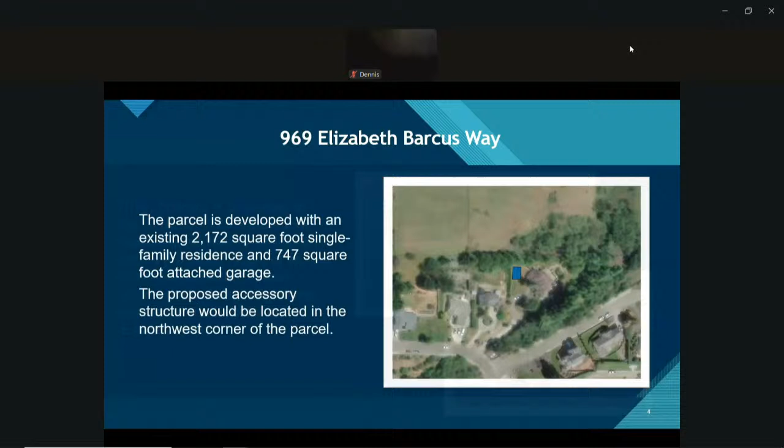The applicant is proposing to construct a 1,728 square foot detached accessory structure with a proposed height of 26 feet, which exceeds the 15-foot accessory building height limit allowed in the Residential Estates zone. These are elevations of the proposed structure. You can see the deck that would be on the north side of the structure facing what is currently a vacant pasture parcel, and the entryway to the structure that would also lead to the second-story accessory dwelling unit.

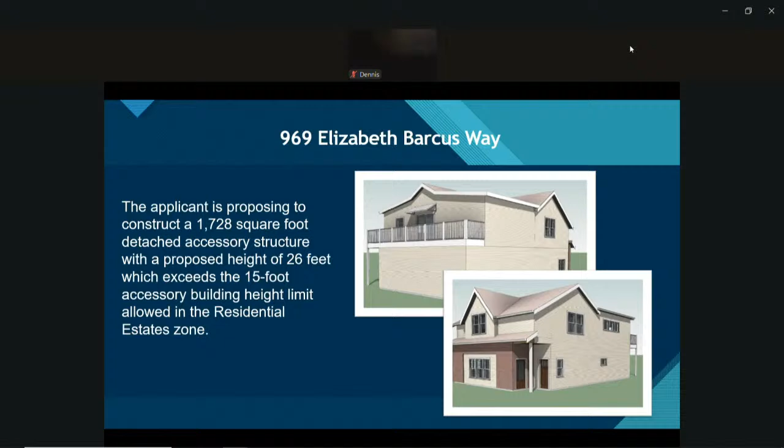The structure will include hobby space on the first floor and an internal 1,164 square foot, two-bedroom, two-bath accessory dwelling unit on the second story. The project includes construction of 2 new paved parking spaces for the accessory structure and the ADU, and parking will be accessed by an existing paved driveway.

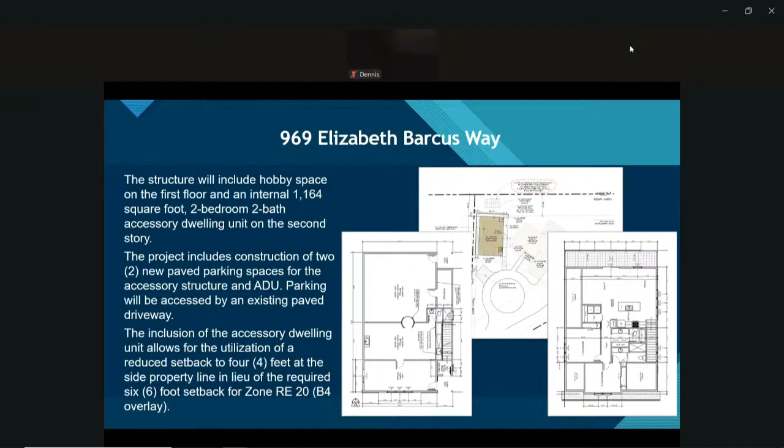The inclusion of the accessory dwelling unit allows for the utilization of a reduced setback to 4 feet at the side property line in lieu of the required 6-foot setback for zone RE20 residential estates B4 overlay. Section 17.03.010, the residential estates zoning district.

You can see here the subject parcel in the northern side of that zoning district, the RE20. The subject parcel and the surrounding area are zoned residential estates with a minimum lot size of 20,000 square feet and a B4 overlay. The B4 overlay allows for a reduced side yard minimum setback of 6 feet and a maximum setback of 30 feet, provided a minimum distance of 20 feet between homes on adjoining lots. The standard for RE20 without the B4 overlay would be a 15-foot setback.

Zoning Code Section 17.03.010E deals with height regulations and states that no principal building shall exceed 30 feet in height, and no accessory building shall exceed 15 feet in height, except as provided for in FMC 17.05.070. That section deals mainly with church spires and the like. Exceptions to the height standard for an accessory building, allowing a maximum height of 30 feet, may be granted through a use permit, which is why we are all here today.

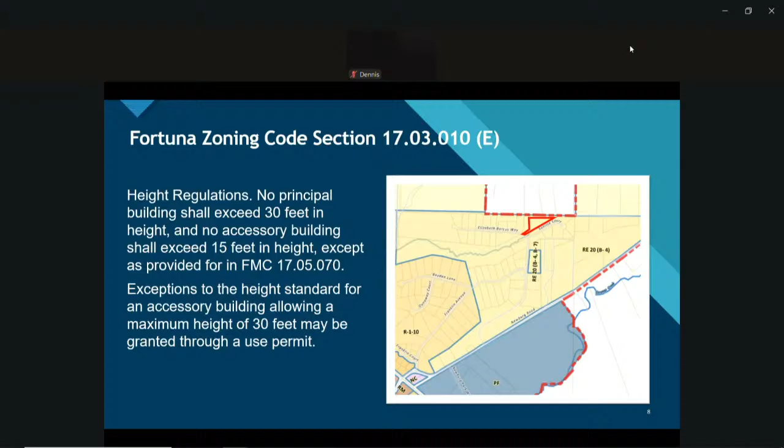Zoning Code Section 17.06.001.5 pertains to accessory dwelling units, and this proposed 1,164 square foot ADU complies with the maximum size limit of 1,200 square feet as outlined in the zoning code. They will be required to obtain an ADU permit because it is larger than 800 square feet, but that is an administrative permit that will be issued in conjunction with the building permit.

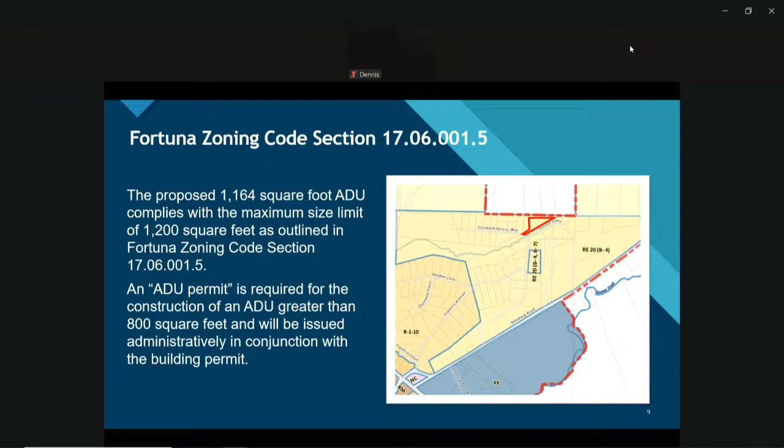Zoning Code Section 17.07.060C states that a use permit shall be approved or approved with conditions by the authorized hearing officer if, based upon information provided by the applicant, specific findings are made. Those findings are shown here in the graphic. Project-specific findings may be referenced in Exhibit A to Resolution P-2025-3139, and we did find that the project is compliant with these specific findings.

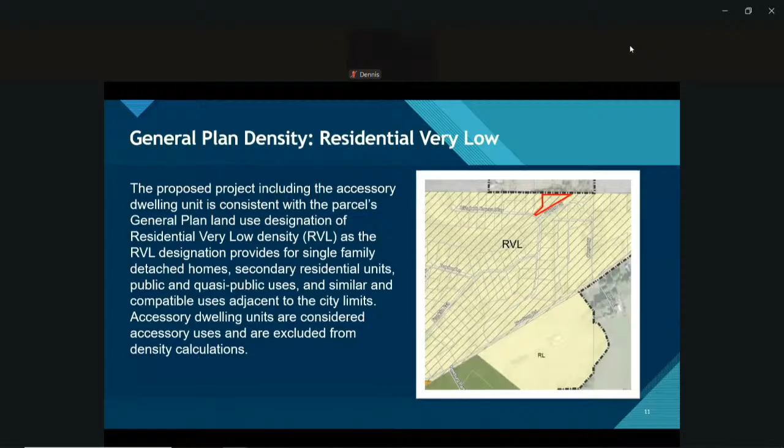The general plan density is residential very low, and the proposed project, including the accessory dwelling unit, is consistent with the parcel's general plan land use designation of residential very low, as the RVL designation provides for single-family detached homes with secondary residential units, public and quasi-public uses, and similar and compatible uses adjacent to the city limits. Accessory dwelling units are considered accessory uses and are excluded from density calculations, so it's not increasing any density for that land use designation.

The project is subject to environmental review in accordance with the California Environmental Quality Act and qualifies for Class 3 and Class 32 exemptions from CEQA. Class 3, Section 15303, covers new construction or conversion of small structures, and Class 32, Section 15332, covers infill development projects. More information can be referenced in the staff report.

Today's Planning Commission action: the Planning Commission should receive staff presentation and review commission questions with staff, open the public hearing and receive public comment, close the public hearing, and motion to adopt Resolution P-2025-3139, read by title only, which finds the conditional use permit complies with the Fortuna Municipal Code and the Fortuna General Plan, and approves the conditional use permit subject to the requirements in Attachment 1.

And that's my presentation for today. I will turn it back over to Chair Kine. All right, thank you Katie, I appreciate that.

At this time, I'd like to give the applicant or their representative an opportunity to speak, if they are here or would like to, or if they're on the phone. Anybody in the chamber? Please state your name and your relationship to the project.